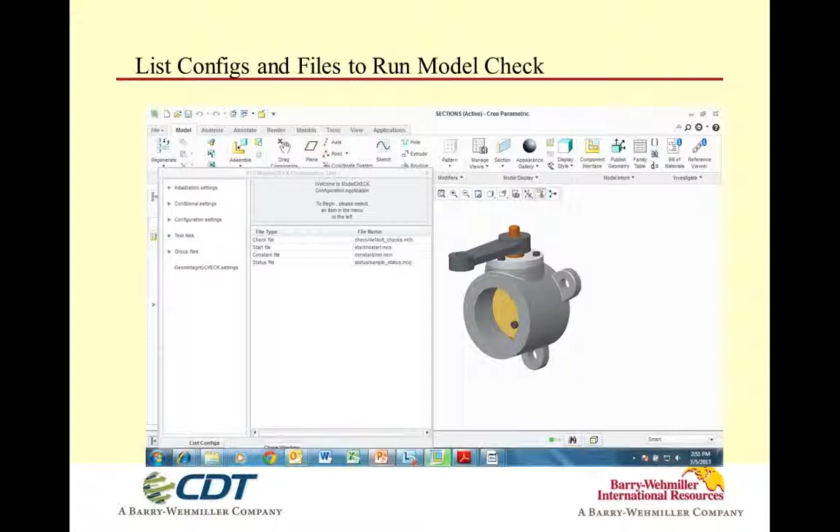And then we're going to actually take and run like this. Take a look at this. As you can see here, we have initial settings. This is what they call the config_init.mc file for ModelCHECK. So you're going to have certain conditional checks.

You're going to have a check for the start file, a check for a constant file. Maybe you have a library or whatever, and maybe it's millimeters or inches that you're looking at for units, and some basic things there.

And then we're going to get into conditional settings and configuration settings, text files, group files, and geometry checks. What I mean by geometry checks is like circular references, or a buried feature where you have a hole within a hole. That's considered a buried feature, so that you avoid a machining error when you go into the manufacturing world.

I highly recommend using ModelCHECK on both the manufacturing side when it goes into model making for manufacturing, and also at the same time when I check it back into my PDM system. So those are some of the things I really like to see.

The other thing I really like to do is use ModelCHECK for my analysis tool, because one of the things you can do is check for material. You can check to make sure the mass properties have been filled out properly, and get into a lot of those characteristics that should be set up front with your start part, start assembly file, or start drawing file.

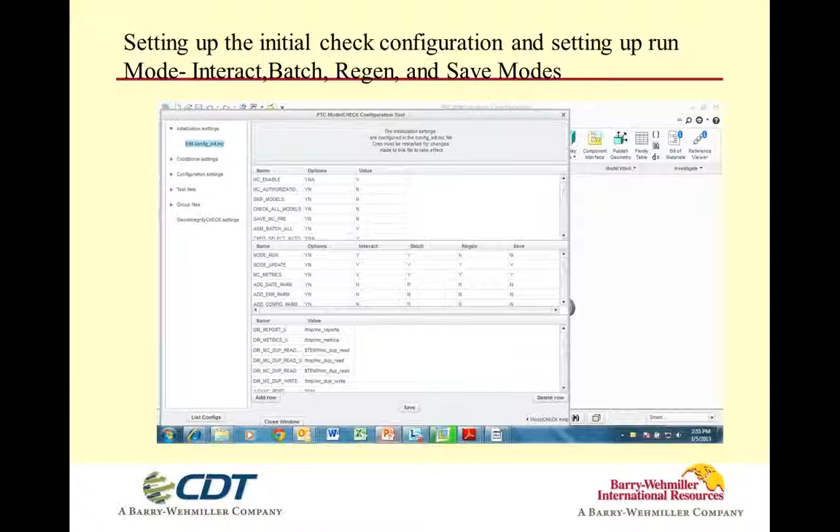This is something that's free to everyone. Today when I walk into a company, I don't see many people saying 'hey, I'm running ModelCHECK and finding errors that I've got buried features in.' You just don't see it, it's just not set up. So I thought it would be a great topic for discussion today in this webinar, because it's free. It used to cost us big money, so I highly promote it, and it's lovely. If you ever want to get into some mentoring on why things are happening, I've got a whole long list of these parameters, and then some that aren't even published, that you can check for.

When I get back in here, you've got basically modes of action. You've got interact, which is this mode right here, and you've got batch. Let me talk a little bit about interact - it's called interaction, meaning it'll actually check as I'm regenerating and moving through that particular file. So it's kind of working with me as I'm building that model up.

If I run across anything that is not a corporate standard - and this is where I really like ModelCHECK - because I can incorporate a company standard to check for this in ModelCHECK and either error for it, warn for it, and actually report it.

So why would I want to report this? Well, one of the big things that happens, you have a PDM system called Windchill, and you can actually take the amount of errors that you see within ModelCHECK and report it back to the PDM system so that you can maintain it by username or by user number and see what the performance is. So you have a total list of what you'd like to actually see in your standards, so that when you create these parts, your vendors know that you've got good parts to begin with.

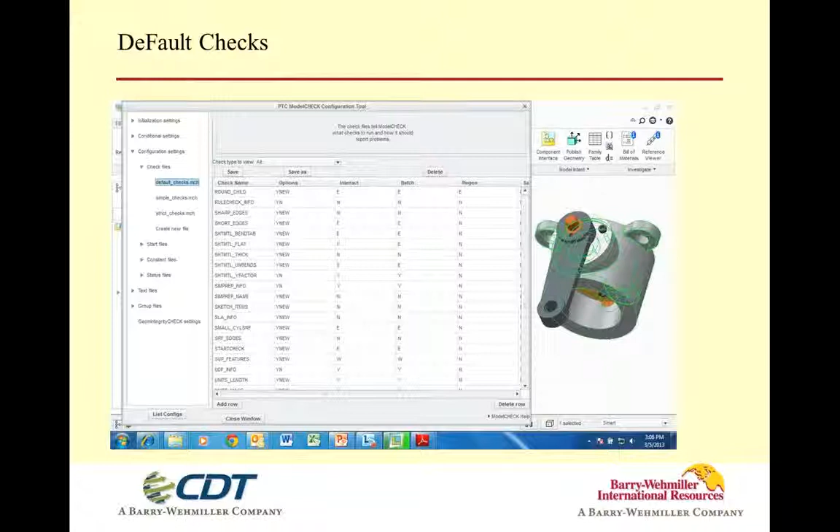Or maybe if you allow a flat pattern, then okay, I'll allow that flat pattern to be in the last 50% or last 25% or whatever I want. So you got some rule conditions that a true CAD administrator would actually do and express upon the organization so that we could maintain good geometry all the way through. And the whole idea behind ModelCHECK is to make sure that you have good geometry.

In my years in administration and in training, I find that as you move forward with your models, the more problems that you see and the more errors that you see, usually it equates to extra time that has to be added to that particular model. And so this is a great way of actually overcoming that, and it's a relatively quick check.

I would say for the most part, you're looking at something maybe 150, 250 assemblies, as long as you have about 10 or 12 checks, maybe take 15, 20 seconds. That's just a good thing, and then it reports back to you. So these are some of the things that you can get into.

One of the big things that I like to also do is I don't like to actually see a library part. I like to see all my library notes. So I have 01, 02, 03, 04, 05, so that those notes themselves are checked by ModelCHECK. So we can actually make sure that there's no errors. Nobody's overridden anything or nobody's actually changed something accidentally. So that when we release it, it's 100%. And you catch a lot of stuff here.

When I initially did a lot of this work, we had basically 10 checks. We checked for basically buried features, circular references, spelling, and then part accuracy, and then whether it was in metric or English. And then, you know, we did some other checks insofar as username, what department, and so on and so forth. So you can use these parameters to actually do it.

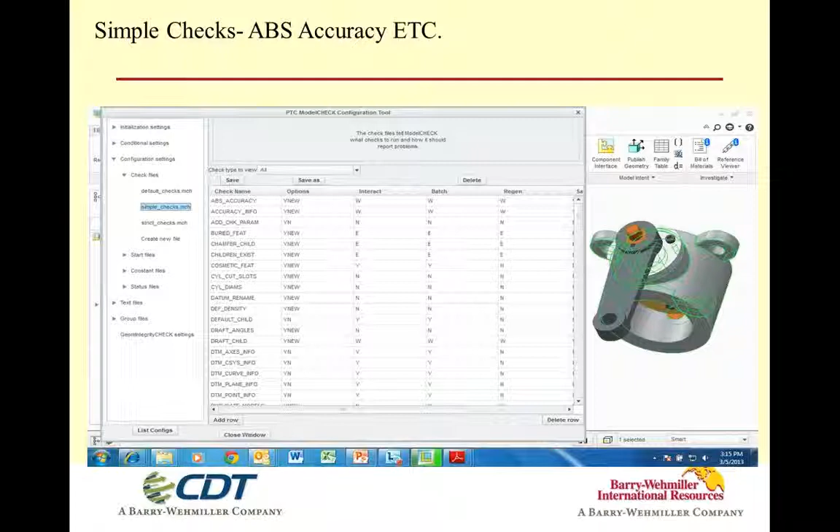Now, I can range that. I can change that part accuracy. And when I change that part accuracy, it can range from, like, if I change it from 0.0012 to 0.00004 or 0.0005, and that's unit. Those things are actually getting to the point where it's getting accurate. Now, what I like to set this at is a range from 0.0005 to 0.0012. Now, if you're going to interface with another CAD software like CATIA or maybe NX or whatever, you can actually change that to make those ranges.

Now, I can tell you from experience, any accuracy that's 0.0005 and below, you can have problems with it growing in file size. As you start to increase the accuracy or decrease the number of that unit, what will happen is it starts growing that file size pretty substantially between 0.0005 and 0.0004, and what you'll find is it's almost exponential as you drop it for every unit. So it's kind of interesting how that actually works.

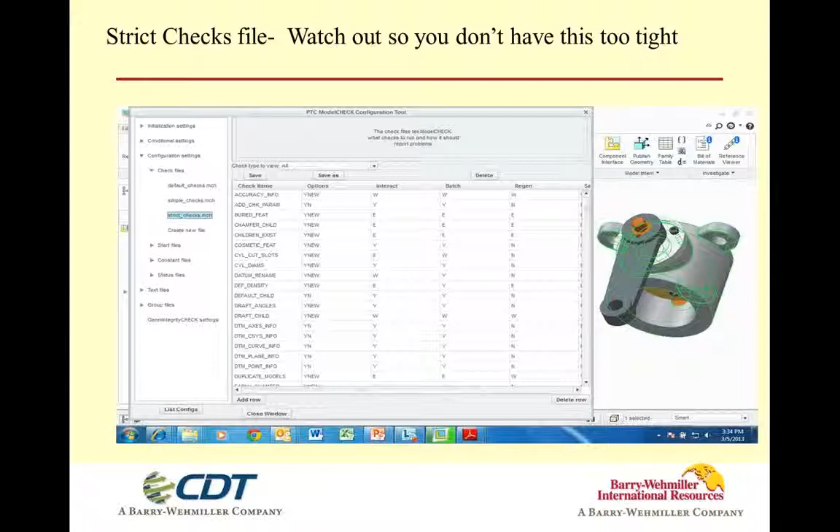We've got some things in here where we can actually look for cosmetic features. So we can say, yes, we can report it in the interaction mode, or maybe we don't want to in the regeneration mode, when we want to only look at it in batch. So this gives you flexibility within that. Something like a cosmetic thread would be a cosmetic feature. Do I want to error for it or warn for it? Probably not. But do I want to report it?

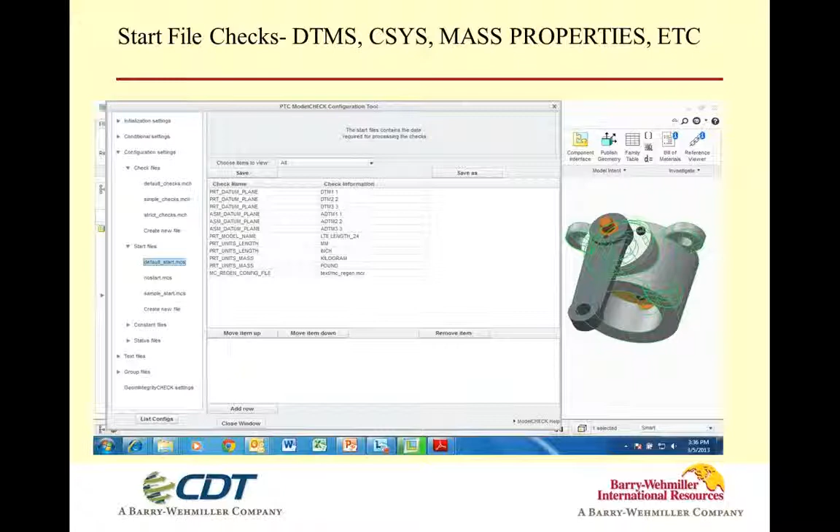Yes. Just to say, look, you have a cosmetic thread here. Is this truly what you want? Does this match maybe a standard that we actually have? Maybe you've got some thread standards, or maybe you've got some weldments that actually have to coincide with that. So these are some of the things it looks at. Datums and coordinate systems. Here again, these are information. You can just report them or not, and so on. So these are some of the things that we can set up in our simple check.

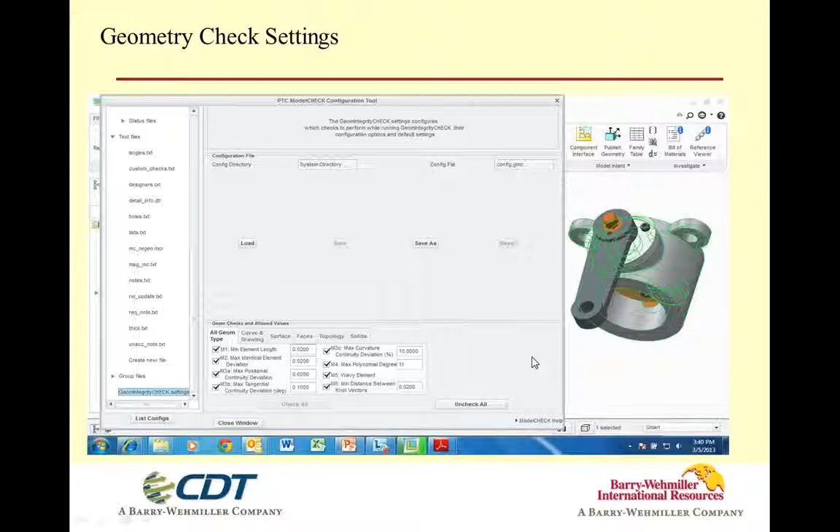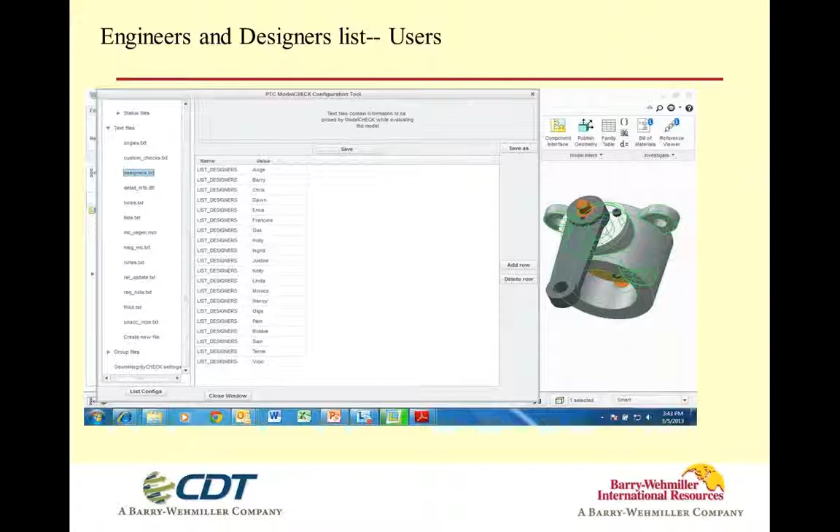If we get into what we call a strict check, this is something that absolutely can't be checked into a database because it's an error and we don't want it in there. So this is where more of your strict checks come, like draft children, maybe something like a buried feature, and you can say, look, these are musts. In the simple check, yeah, we'll let some things slide. But in the strict checks, we can say, look, this is what we've got to actually have.

Or maybe you eliminate simple checks and strict checks and create your own check. Maybe you have only 5 or 6 or 7 different things that you want to start with first. And then every month or so, add 2 more, 3 more, 4 more, whatever. And you'll find out after a year, you'll actually have probably about 20 or 25 checks. And what you'll find is your models start to regenerate faster. And people start to say to you, I don't know what we're doing, but boy, our models have really gotten good, and we can really do our jobs quicker. The regeneration process becomes more streamlined. And so these are some of the things that you look at.

Now, I'm not saying that you set every one of these to its finest. So these are some of the things that can actually happen to us. We can look at something like in the start file. So we're going to look at the datum planes, DTM1, DTM2, DTM3, assembly 1, 2, and 3. Maybe we've got something like a model name that we need to do, whether it's in metric or whether it's in inches. And these are just some simple checks that we can look at in the start files themselves.

Now, if they don't have them, of course, then we can either error for it, warn for it, report it, or no report. So it's up to you where you want to actually set these. It takes a little bit to get configuration. I do have a file that I typically like to start with, and then I start adding from there. So those are some of the things that I've done throughout my years of working with ModelCHECK.

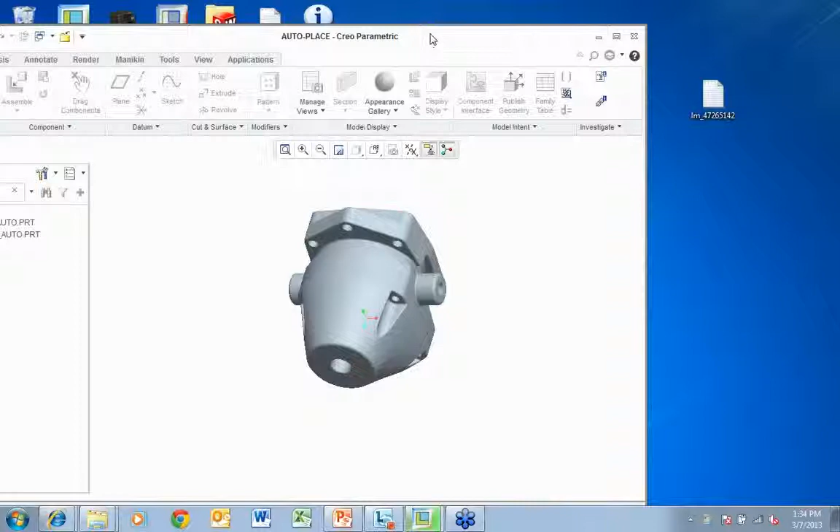Then you get into some of the information. So across the top here, we have all info, parameters, layers, features, and relationships. Relationships, that's a good thing. So if I want something that's in a relationship, and I want to check that relationship and make sure it's always verified, can I do that? And the answer is yes, I can do that through ModelCHECK, and check to make sure that that relationship is always maintained and works based upon those features that I have.

Datum planes or datum axes, all those can be reported. Maybe you have something set as miscellaneous, maybe you have some tools or whatever, and then of course the geometry itself comes into play there. So those are some of the things that you'll actually see and be in place.

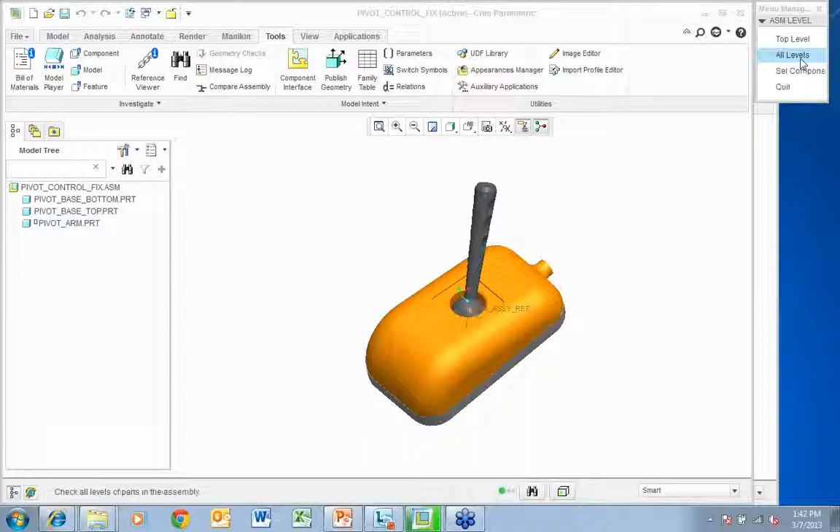And then, of course, you can close the window - do I close it? Yes, I do. Now, one of the big things I can do is come over here and launch ModelCHECK and see what happens. In this case here, I'm going to do this as interactive. And then if I go over here, there's what you see, all levels, top level. So this means by interactive, I can call upon it at any time and run it. It's not going to run for me automatically because I'm not hitting regenerate and I'm not hitting save. When I hit those two types of conditions, if I had those set, then it'll actually run ModelCHECK and report. In this case, I'm using interactive, so it's called upon.